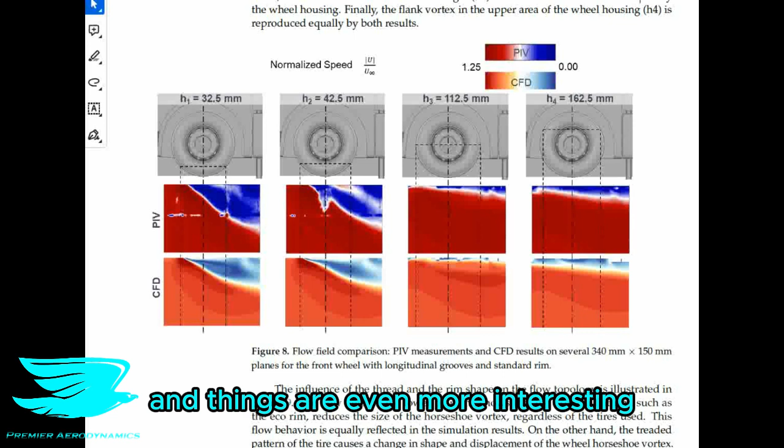Things get even more interesting when you consider the different sections of a wheel. You obviously have the rim, but then there is also the tire, as well as the tread on the tire, like the longitudinal grooves and lateral grooves, and even the wheelhouse packaging. Understanding how all of these things affect a wheel's drag is the first step to reducing it, which is obviously a good thing because you can save fuel and then use that fuel later to create bonfires, or whatever.

So to look at how a truck wheel's rim and tread affects its drag, we're going to look at a paper called Experimental and Numerical Investigation of the Aerodynamic Ventilation Drag of Heavy-Duty Vehicle Wheels.

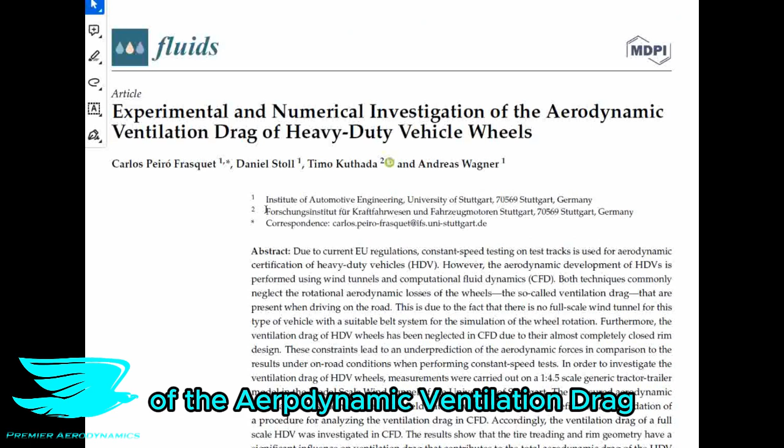This is a cool paper to me because the researchers are not only looking at the typical one wheel configuration in a car, but they also have the double wheel. Sure, the one wheel configuration is quite interesting because you do have some trucks with that at the front as well, but the two wheels stacked together is also quite interesting because we don't see this too often. So we're going to be seeing some results that we don't really come across very often.

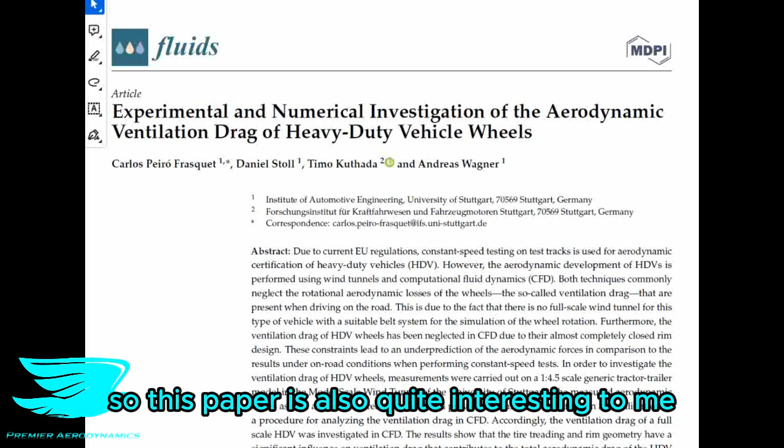This paper is also quite interesting to me because they seem like they really try to do a lot of things in this one. Usually the best approach to a paper is to focus on one specific thing and make the entire paper about that. Here, they're not only looking at the wheels, like the rims and treads, which are really interesting, but also at the CFD setup to look at this, as well as the ventilation drag, which we'll actually get to in a second.

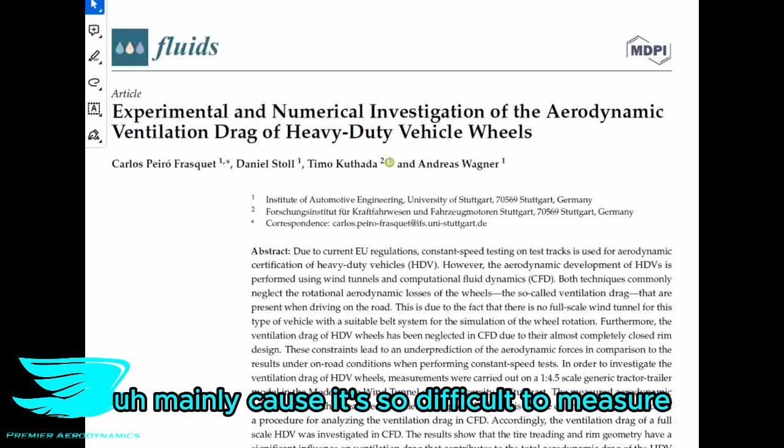The ventilation drag is something that we don't really cover very often, mainly because it's so difficult to measure. So the question is, what is ventilation drag? It's a fairly uncommon term, but it refers to something that can seem like a phantom drag because we can't really measure it in a regular wind tunnel.

So to describe to you what it is, consider a regular car. It has four wheels, hopefully none have been stolen, but anyway, four wheels. And as you are driving along, the air hits them and creates this force backwards on them. We all know that to be the drag.

But the plot thickens when you consider the spokes of the wheels, for example. As the spokes chop through the air, sure, there is a backwards force on them that contributes to the overall drag of the car, like the air is trying to push back the spokes at the top of the wheel so that the car has some resistance going forward.

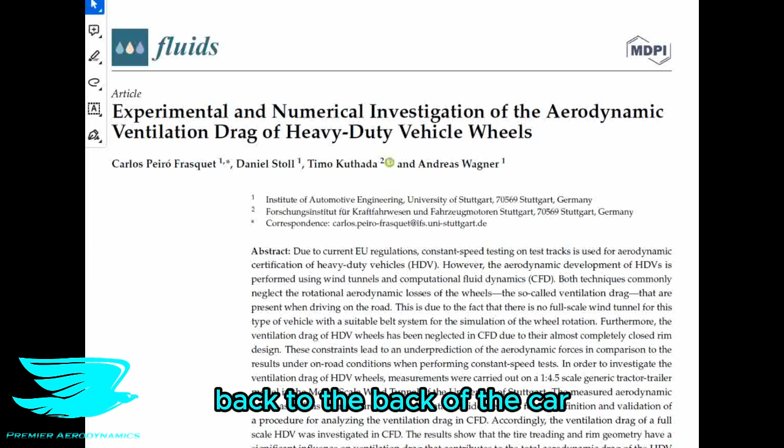But there's also a moment created on these spokes, because if you think about the spoke at the bottom of the wheel, as it rotates back up to the back of the car, it's actually going with the flow at the bottom. So the drag that it produces should be minimal, especially when you consider that the farther away you get from the axle, the greater the distance is, and hence the greater the tangential velocity of that spoke at that point. Hence, they'll match the free stream velocity and potentially even exceed it in some points when you have a wake.

So when you have the front of the wheel, there's some wake coming off of that, and it's hitting the spokes at the bottom of the wheels. These spokes are potentially going to be moving faster than the flow hitting it. So in theory, you actually have the spokes traveling faster, and the air in front of these spokes is actually stopping it from moving backwards, so it's actually stopping the wheel from rotating at this point.

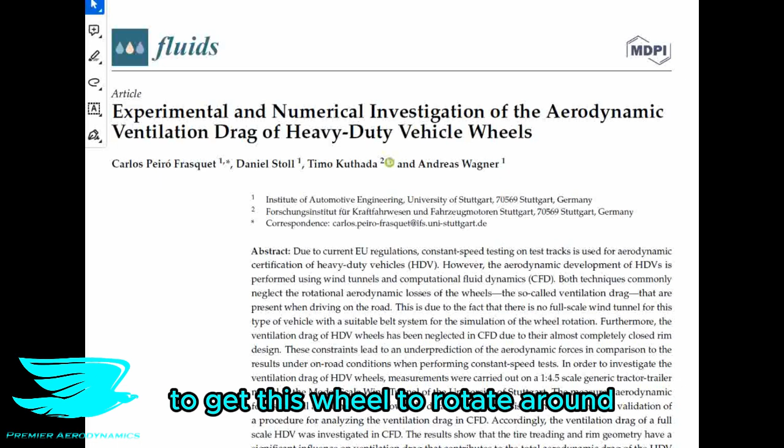And that results in this moment that's effectively resisting the wheel's rotation, which means the car has to put more force into the wheel, more moment, to get this wheel to rotate around. And that is something called the ventilation drag.

And that comes about because even though this spoke is being forced forwards by the air behind it not getting out of the way in time, that actually makes it harder for this engine to push the car forwards. And so we can now expand our focus from this one point on the spoke.

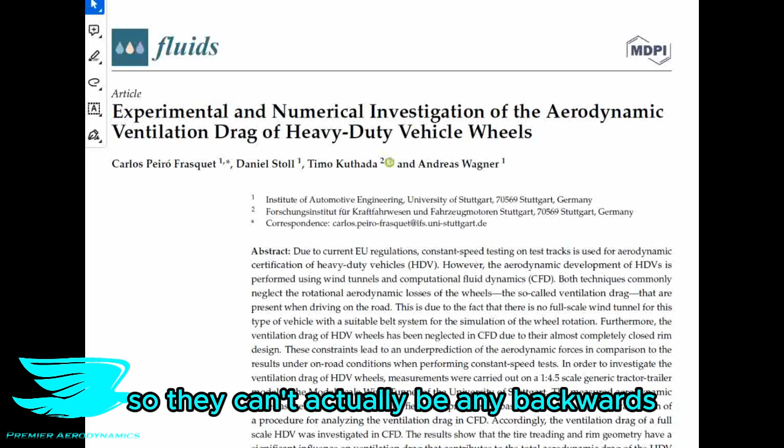Think about the spokes in general as they go around. These spokes are chopping through the air, and even if they are chopping down, the backwards force on the spokes is negligible because the pressure acts perpendicular to the surface, and the spoke surface is parallel to the direction of travel at this point.

So there can't actually be any backwards force or any drag on these spokes when they're completely parallel to the ground. But because the spoke is struggling through the air, that creates more resistance for the engine to overcome, and hence it is kind of like a drag. And because of air, it is in fact a drag, and this is what ventilation drag is.

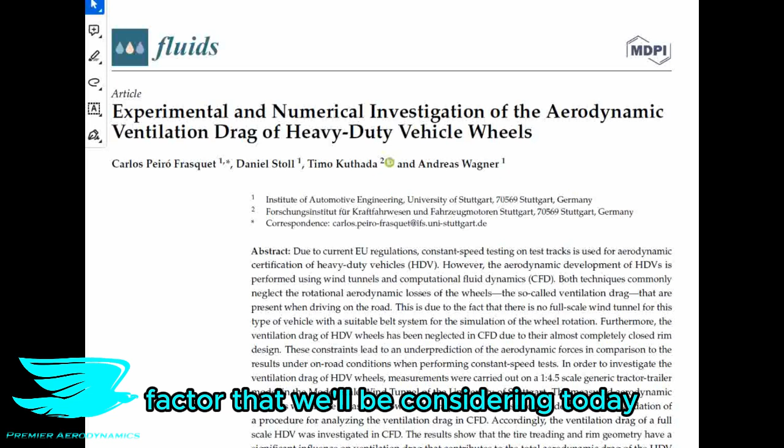That is one additional factor that we'll be considering today. And ventilation drag comes about not just because of these spokes, but also because of the tread, which we'll get into later on this podcast. So let's jump into the researchers' methods to see how they investigated the effects of the rim, tread, and number of wheels on the drag and ventilation drag.

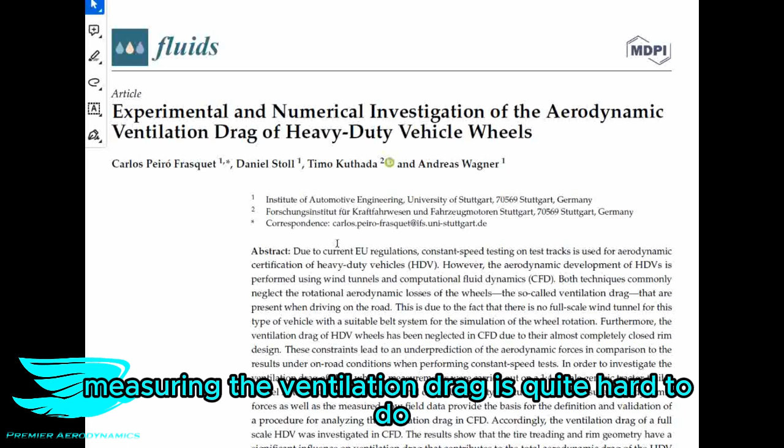I should also mention that measuring the ventilation drag is quite hard to do. One common method is to see how much load there is on the units driving the wheels in the floor. Another method is by putting torque meters in the axles that connect to the wheels to see how much moment is being produced. So now let's move on to the methods.

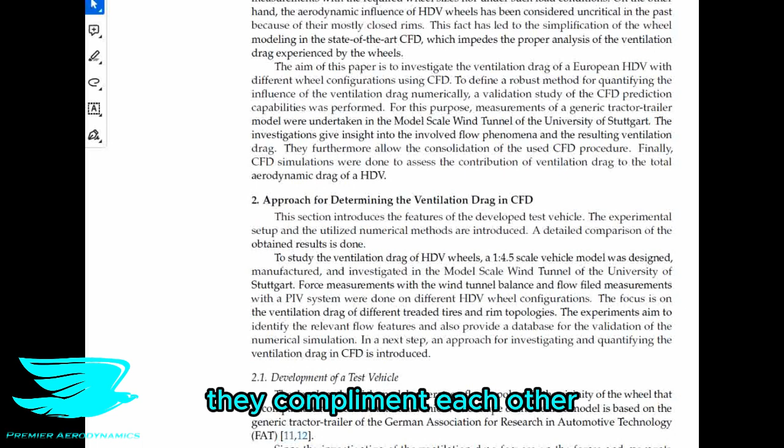So they used both CFD and experiments, which is good because when done well, they complement each other. And first of all, they used a 1 to 4.5 scale model of something they term a heavy-duty vehicle. Figure 1 here shows this vehicle.

It is a half model with only the left half of the vehicle modeled, and then there's this splitter plate going down the halfway point. And that definitely introduces some limitations because the periodic vortex shedding nature is not captured. But for a general idea of how the wheels affect the drag, this is an okay approach.

So the reason why they might have gone with this model could be to get a higher Reynolds number with a larger model, or it could be to reduce the number of cells they needed in their CFD with only a half model here. They say that this vehicle develops a flow topology in the vicinity of the wheels that is comparable to a real commercial vehicle. I'm not really sure how comparable it is because they don't give any numbers or figures, but as a general approach, I guess it's okay.

To be perfectly honest, there are so many different types and shapes of heavy vehicles that it's not so much that this vehicle approximates a typical heavy-duty vehicle, but rather that there isn't really a typical heavy-duty vehicle when you think about it. So this geometry is fine, I guess. There are also different types of heavy-duty vehicles. So this is just a generic type, I guess.

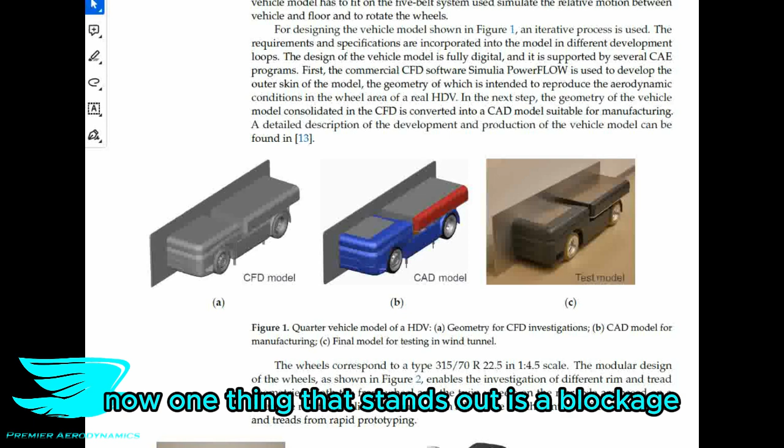Now, one thing that stands out is the blockage ratio that I mentioned. So for this model in a wind tunnel, it is 7.8%, which is quite high. I mean, because they have a 3/4 open test section, which actually I think in figure 5, if we scroll down, here we go, we actually see this test section here. We have the 3/4 section open test section.

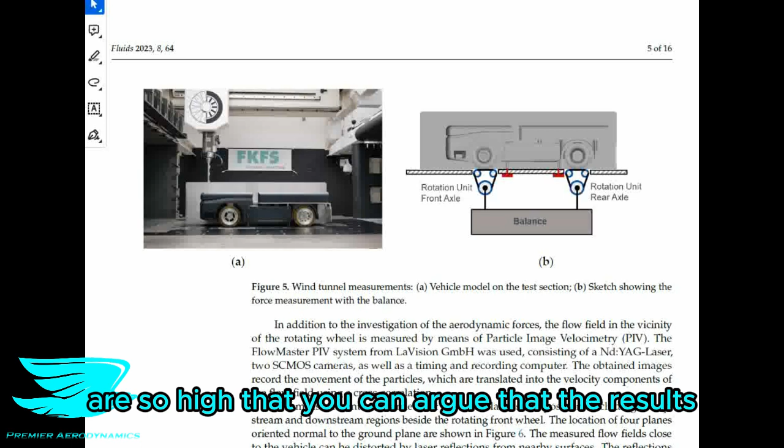And for something like this, the upper limit is about 15% blockage ratio, but once you start getting above about 10%, the correction factors are so high that you can argue that the results really aren't that valid anymore anyway, because the flow physics has changed so much. But even at 7.8%, that means you need to have quite a decent amount of correction.

And obviously you can actually get a higher blockage ratio in a 3/4 open test section than a completely closed test section. And for those of you who don't know, the 3/4 test section means that you just have one surface present and the other 3 walls around the test section are not, as we see here in this figure.

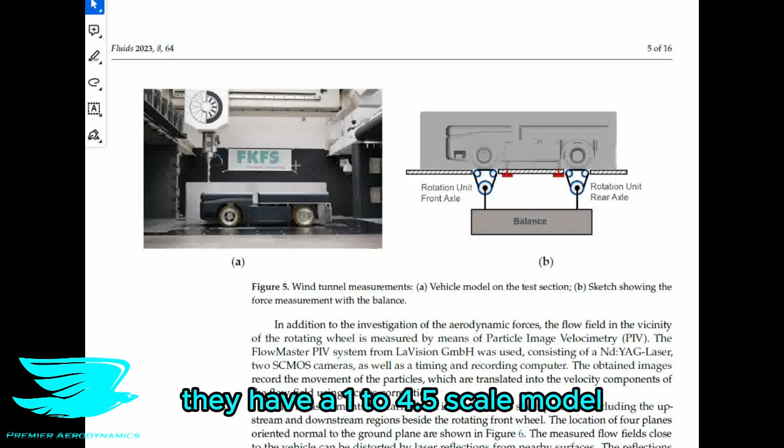As mentioned, they have a 1 to 4.5 scale model. If they went even bigger to something like a 1 to 4 scale model, the blockage ratio would be really high. They also say their goal was to achieve a fully turbulent boundary layer at a Reynolds number of 300,000, which is also one of the reasons why they went with such a scale.

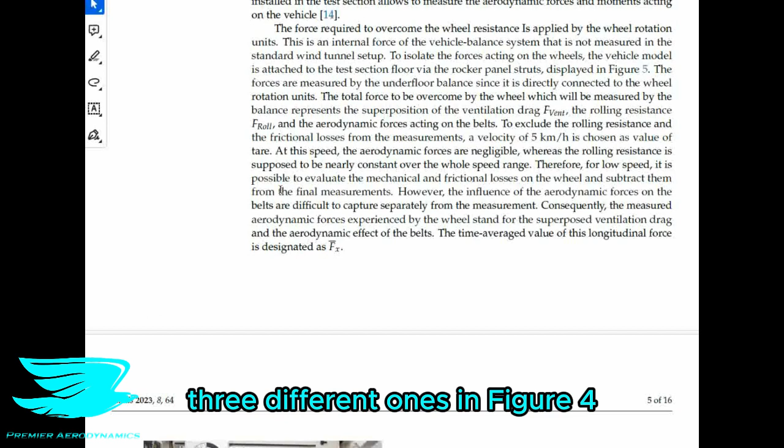Now, to test the different rim designs, namely the 3 different ones in figure 4, if we scroll up here, these 3 different rim designs, they used a modular rim design where they had effectively the base rim, and then they could just add additional parts to it, as you see here in figure 2.

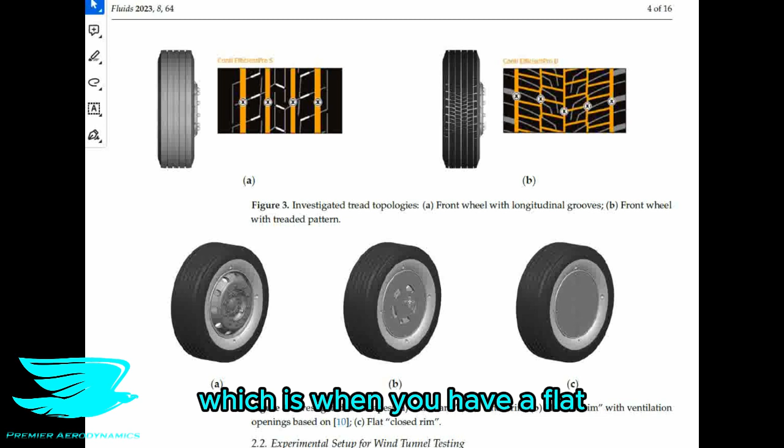They then have the typical truck rim, which has this raised center, as we've all seen on trucks. They then have something called an eco rim, which is when the rim is actually flat instead of poking out, and that has only a few openings, probably just for the cooling flow. That's about it, I'd imagine here.

And then they have a completely closed rim, which usually achieves the lowest drag, and we'll see in this investigation if that is also the case. My money is going to be on that - this is going to be the lowest drag rim.

So they also tested 2 different tread types, 2 different tread patterns. The first one in figure 3A is just this longitudinal groove, and the second one is with the lateral grooves as well. So you have the longitudinal grooves and the lateral grooves.

This is what I mentioned earlier, where they're trying to do so many things in this paper. In my opinion at least, they end up with different rims, different treads, different ventilation drags, CFD setups, and by trying to do everything in one paper, you usually do nothing that well. Usually you just have one different type of rim design or different rims to test, and then one different tread or different tread patterns, or you just focus on the CFD method, not all of them at once. So that results in a lot of questions being raised about the results.

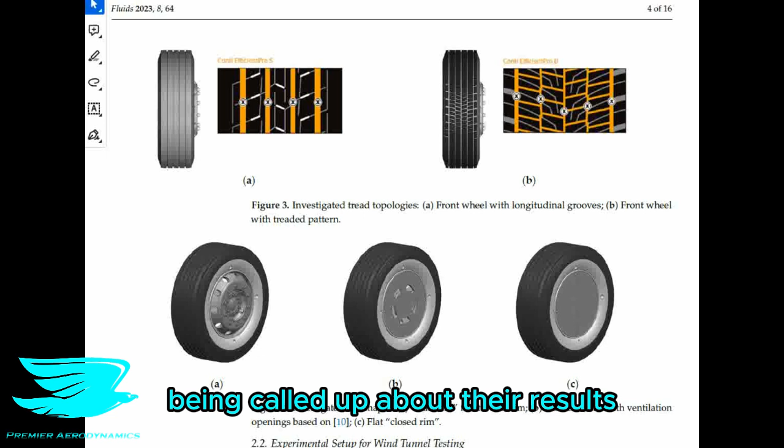But anyway, in figure 3, this shows the tread patterns investigated. The longitudinal grooves are the ones that go circumferentially around the tire, and the lateral grooves go across the tire, connecting the inside parts of the tire to the outside parts.

In fact, one of the hardest things to do when it comes to groove pattern aerodynamics is to somehow characterize them properly, because there are more tread patterns than you can poke a stick at. If you go into any car mechanic or something, you will see so many different types of treads.

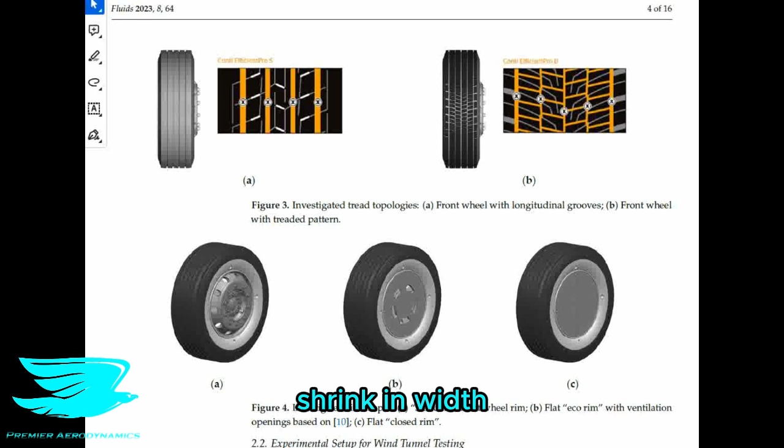So you have these lateral grooves at different angles, different depths, different widths of the lateral grooves and longitudinal grooves as well. On top of that, you then have to consider how the geometry changes when the wheels are rotating, because as the wheel rotates, the rubber, which is elastic, deforms and starts to stretch out in diameter and then shrink in width. Then you have the wear and tear aspect on tires, where people are driving around with all different levels of wear and tear. So there are so many aspects to consider when looking at tread patterns and their effects on aerodynamics, which makes it really hard to do.

In my opinion, it's probably the hardest thing to do on cars in terms of aerodynamics at the moment. So anyway, we can see that there are 2 different tread patterns here on 3 different rim designs, making a total of 6 different configurations.

Now, the authors say that the experiments were conducted in the model scale wind tunnel at Stuttgart University, which we saw in, I think it was figure 5. They then say that the wind tunnel features a state-of-the-art setup, including a 5-belt system.

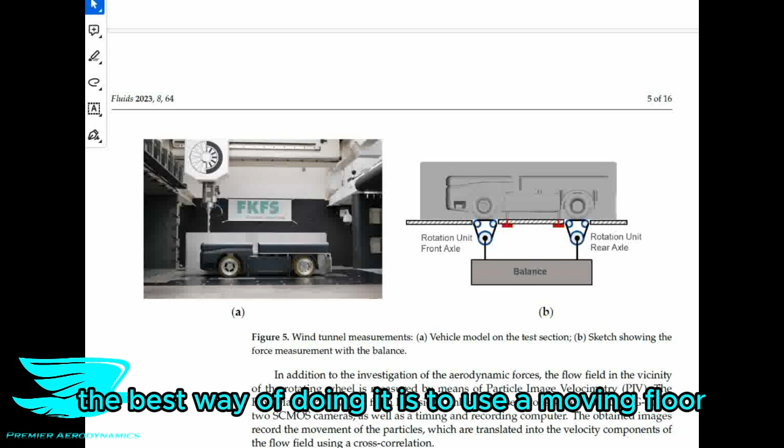For those of you who don't know, when you simulate wheel rotation, the best way of doing it is to use a moving floor, achieved by using belts that are driven on the ground underneath the car. In figure 6, if we scroll down to that, we can see one of the wheels on one of the belts just here. It's a little bit hard to see, but just underneath this contact patch is literally where you have this moving belt. It's usually like this sheet metal that goes around.

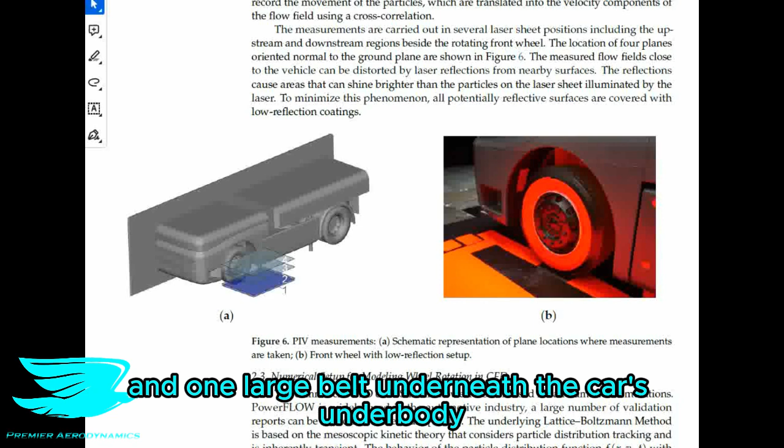This particular belt system is called a wheel drive unit because it drives the wheels. A 5-belt system is where you have one belt under each tire and one large belt underneath the car's underbody between the two tires, the left side and the right side. The belt extends from a little further upstream than the start of the car all the way past the rear of the car.

So why do we have these 5 belts? It's obvious we need one belt for each wheel to drive them, but we also want to drive the underbody. So why do we have this large belt underneath the underbody?

This is to make sure the boundary layer grows there in the right way, or actually that it doesn't grow at all. This matters because if you imagine a car driving along, the car moves along the road, but there is no relative motion between the air and the road, unless you have a gust. Let's say it's a still day, there's no relative motion between the air and the road. It's the car that is moving, so no boundary layer forms on the road.

But in a wind tunnel, we accelerate the flow and the ground is stationary, so there is relative motion between the air and the ground. This creates a boundary layer, which is exactly what we don't want, because that doesn't replicate real life conditions. So the large belt underneath the car stops there being relative motion between the air and the ground, because the ground there, the belt, is moving at the same speed as the free stream air.

Hence, no boundary layer forms, at least generally speaking. If you have some wakes etc., that affects the boundary layer and the ground, but that's also somewhat true when you're driving along. Now you might be thinking, what about upstream? Air is coming from there and there's no belt there yet, the belt only starts as we approach the car.

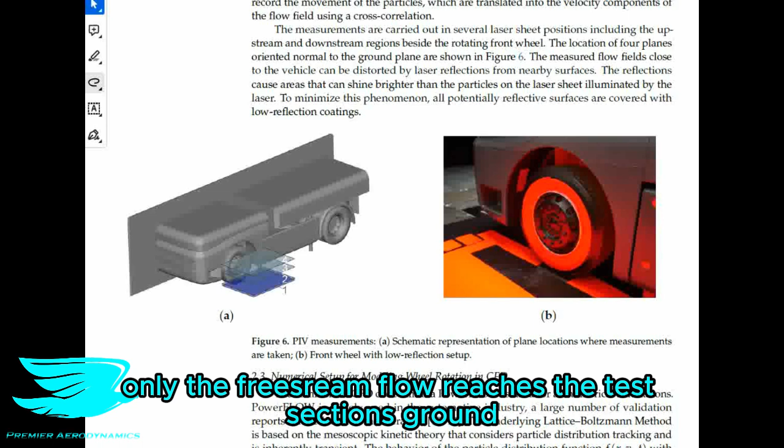The boundary layer control system consists of the following. As the contraction reaches the test section, there's a boundary layer scoop that cuts off the boundary layer and diverts it away from the rest of the test section. So only the free stream flow reaches the test section's ground. At the start of the test section, the flow is the same free stream velocity as when you go up into the middle of the flow. That's what's on the ground.

As the flow flows along the ground towards the car, a boundary layer does grow. But just before the car, there's a suction system, literally a bunch of holes in the ground that sucks the air in. That ideally gets rid of the boundary layer so that now the only air hitting the belt is the free stream flow.

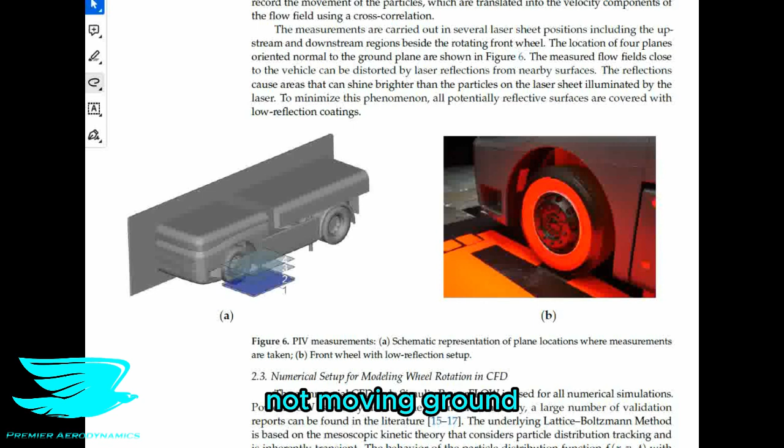Now for the 5-belt system, things get even more complicated, because there are no belts between the front left wheel and the rear left wheel, or between the front right wheel and the rear right wheel. Literally between the two wheels, upstream and downstream, there's just regular floor, not a moving ground. As such, a boundary layer can grow in each one of these regions.

So to stop that from happening, at least ideally, there are things called blowers at the rear of the front wheel drive units. These blowers literally blow free stream air velocity behind the front two wheels to overcome the boundary layer that would usually form there.

Then behind the rear wheels, there's no belt between them and the rear of the car, which means boundary layers could grow there as well and affect the diffuser. So to overcome that, blowers are also used at the rear of the rear wheel drive units, to overcome that boundary layer too.

So the boundary layer control system is just what I mentioned there, in a nutshell.

As I said, I could go on a lot about this and the difficulties associated with them, but that would have to be for another podcast and many other podcasts. Instead, I want to focus on something they say here, and that is that this facility the authors are using has a 5-belt system, is state-of-the-art.

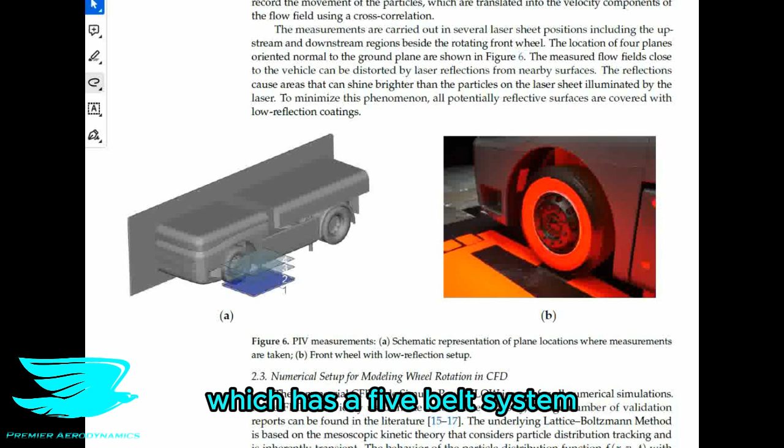Well, a 5-belt system is not state-of-the-art, actually. A 1-belt system is, where the entire car just goes on one big belt. That is state-of-the-art. In fact, you could even argue that a 3-belt system is better than the 5-belt system, because now there is the technology to measure the forces on the wheels through even a 1-belt system. So technically, a 5-belt system is not state-of-the-art. It's good, but not the best.

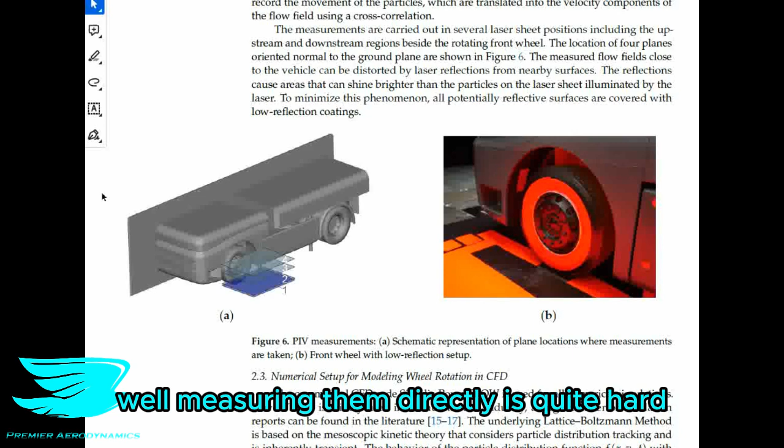But anyway, let's move on. Remember how we were talking about the ventilation drag of the wheels measured? Well, measuring them directly is quite hard, and those researchers didn't do that exactly. Instead, they measured it coupled with the rest of the wheel drag, which is still pretty good. You don't come across that too often.

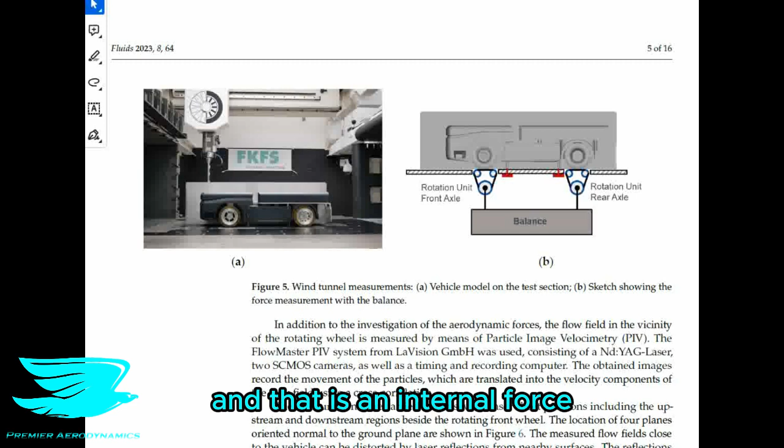However, the problem with that is if you want to know what the ventilation drag of the car wheels is, that is the force determined by the wheel drive units, and effectively how much you have to drive these wheel drive units. And that is an internal force. So you don't get to know that through the normal setup that we have here.

So in order to add the ventilation drag to the overall drag of the wheels, the researchers secured the car to the wind tunnel with these red struts, which would usually be connected to the load cell. Instead, they connected the wheel drive units to the balance. That way, they could measure how much force the wheels were putting into the wheel drive units, and as such, the ventilation drag as well.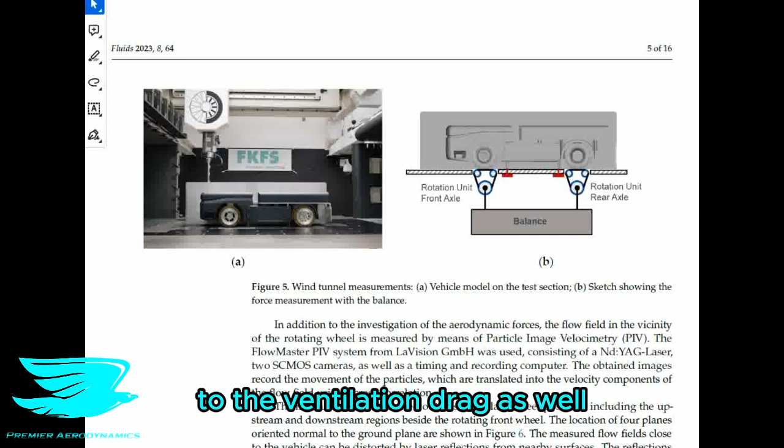So to do that requires a lot of work to change the setup. This is a very complicated and sophisticated setup, and just to change this takes a lot of time and work. It can even be risky, because these load cells are incredibly sensitive, and if you start changing things, there's no guarantee that when you put things back, you're going to get it right and the uncertainty will be the same. But anyway, these researchers went to great lengths to do this, so that's pretty impressive.

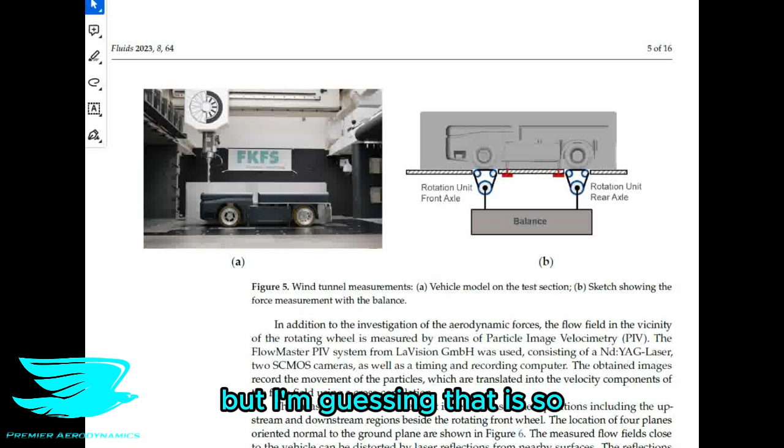They say later on that the uncertainty in the load cell is plus or minus 0.1 newtons, which is quite low. I'm not sure if that is a 95% confidence interval or not, but I'm guessing it is, because that's usually the standard for these load cells.

So in addition to the forces they took in this setup, they also took some PIV measurements, which gives us some really interesting results, and we'll see them later on.

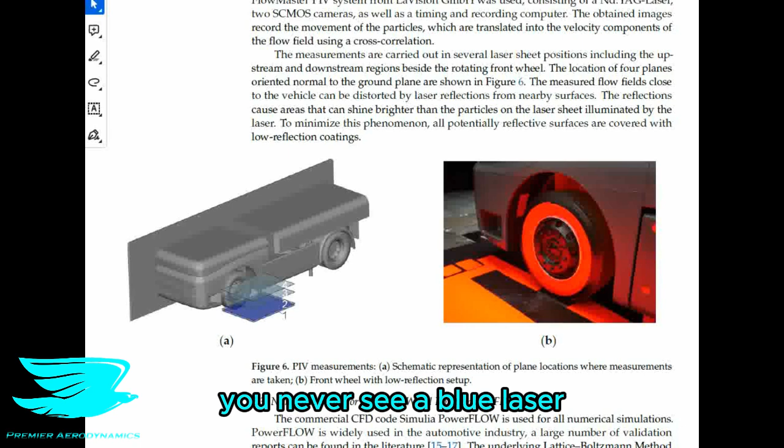The PIV laser they used was an Nd:YAG, which is like the most common laser ever. It's pretty good. It gives a green laser, but it gets boring after a while because you almost never see a non-green laser. You never see a blue laser or a red laser or an infrared laser, which you can't see anyway, but it would still be nice to imagine seeing it. You only ever really see green, and I just don't want to exclude any other colored lasers. All are welcome, and we should make a greater effort to have different laser colors.

Anyway, they took the PIV laser sheets around the front wheel, which we are showing in figure 6 here, in these 4 sheets here. So let's move on to the CFD setup, because they use a Lattice-Boltzmann method solver.

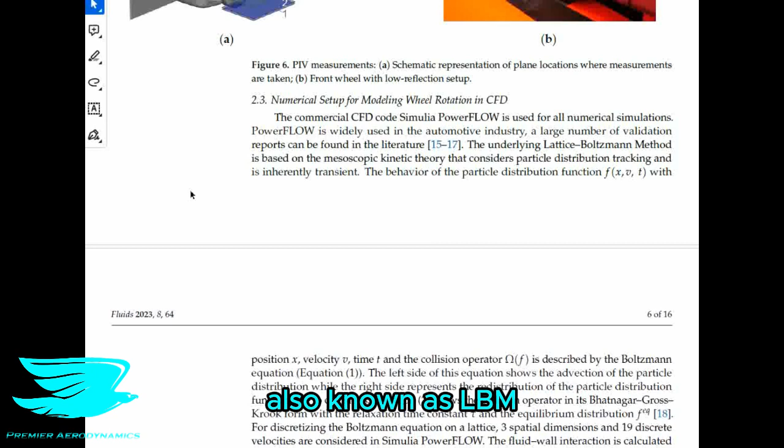And if you don't know what a Lattice-Boltzmann method solver is, also known as LBM, they are the main alternative to Navier-Stokes solvers at the moment. Navier-Stokes solvers are by far the most common CFD solvers, but Lattice-Boltzmann is becoming more popular because it is a much more efficient approach when you have multiple cores. That is because of the type of information shared between the cores and how much information is shared.

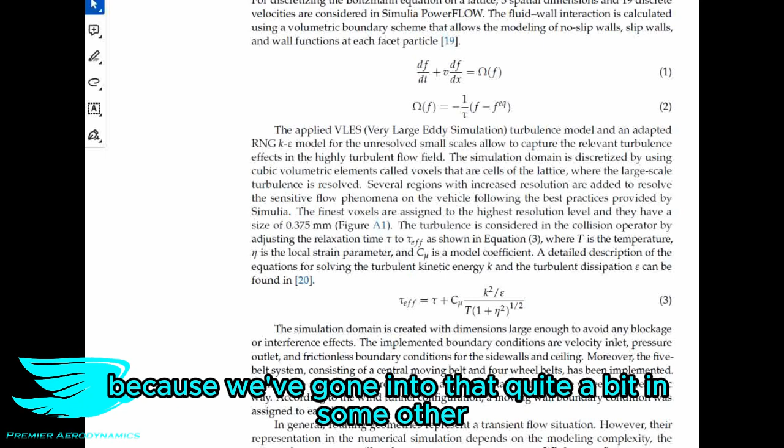I won't go into that because we've covered it quite a bit in other podcasts, numbers 85, 86, 91, and 92. So if you want to know more about LBMs, check out those podcasts.

Anyway, this setup is mostly what you'd expect, except when you get to the wheels. Simulating the wheels has been the bane for automotive aerodynamicists for a long time, and even still, there isn't an accurate way of doing it. In fact, the most promising way is what these researchers have done, but from what I can tell, they didn't actually need to use this method. Let me explain what I mean.

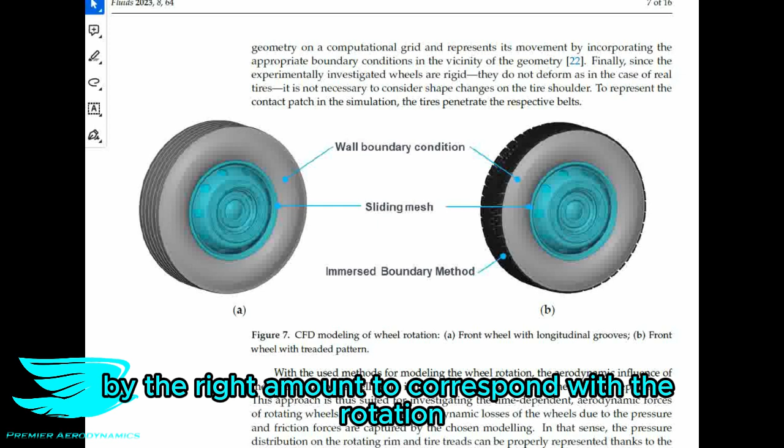These researchers used a sliding mesh on the rim, which is quite standard practice. This means each rim has its own little domain, completely circular, and each time step this little domain rotates by the right amount to correspond with the wheel rotation. This is completely fine, as long as you get the meshing at the interface right, which only happens if you have a fine enough mesh. Otherwise you get mismatching between the local domains and the global domain. But anyway, it's simple enough, generally speaking.

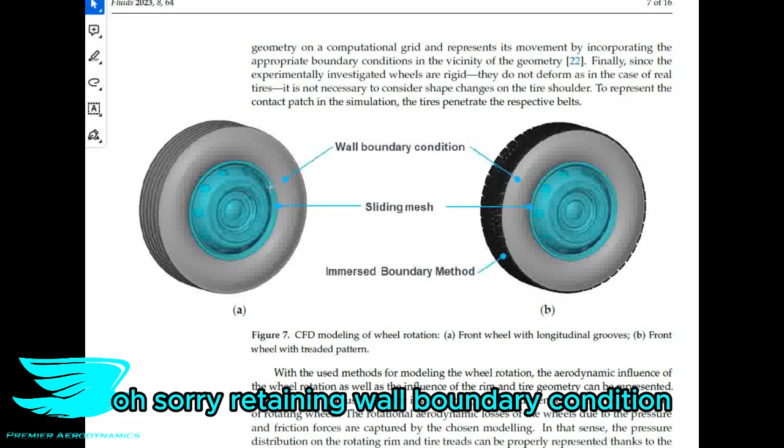As for the side walls of the tires, they have a rotating wall boundary condition, which is good for this purpose because these walls are smooth. What that means is there's a tangential velocity applied to these walls, and that simulates their rotation. That's fine too for this particular approach.

Now we get to the good part, which is how they simulated the tread. To do this, they used a method called the immersed boundary method. This is really cool, particularly for simulating fluid structure interactions. A fluid structure interaction is what it sounds like - where you have a fluid and a structure interacting, and usually one affects the other and vice versa. In this instance, using the immersed boundary method for the tire is very good.

It's very promising because the tire deforms not only as you spin it, but as it reaches the contact patch on the ground, it touches the ground and has this loading on it, so it deforms, and as a result there's this bulge that forms. Then as it rotates back up, the tire gets pulled and stretched. So there's quite a bit of deformation going on throughout the entire rotation cycle.

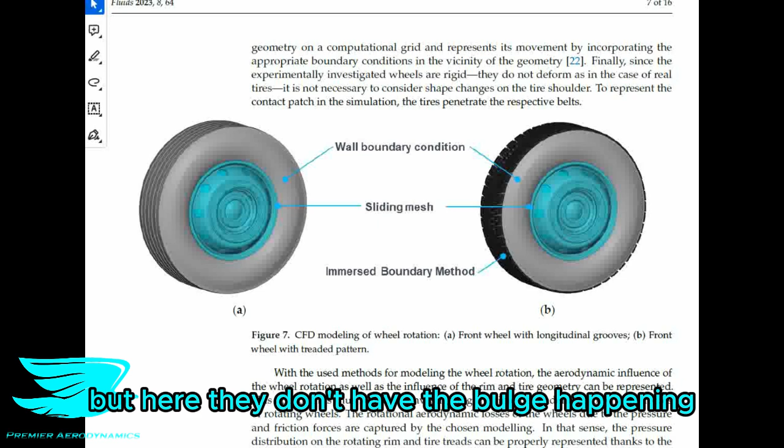Now, if you were to use the sliding mesh approach, which has been the typical way of simulating rims, we couldn't actually simulate the bulge, because as the tire rotates around, the deformation begins, and then when it lifts off, it doesn't - there's no axisymmetric thing going on here. But in this case they don't have the bulge happening, and this is because they have a rigid tire.

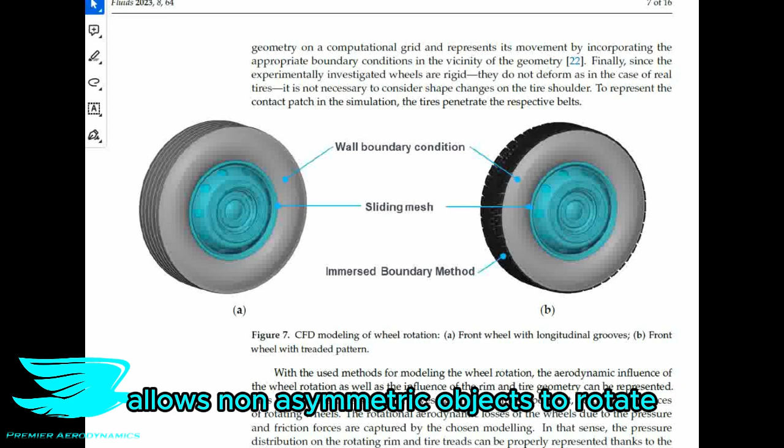The immersed boundary method allows for this deformation to occur because of how it works: if we effectively have two grids on this domain, when the solid deforms, it tells the other grid, hey, this is actually fluid in this region now, so you use the fluid equations instead of treating it as a solid. Then when it becomes a solid again, it says, okay, I'm now a solid again, so at these points we're going to use the solid equations and not the fluid equations. So the immersed boundary method allows non-axisymmetric objects to rotate and even change shape.

Now, in this particular case, as I mentioned, these researchers chose to use this IBM method here, this immersed boundary method, but the tire is not deformable. So I don't see why they decided to use that method instead of just putting the entire wheel in the sliding mesh method, because the sliding mesh method will handle an axisymmetric tire as we have here. But maybe it worked out to be less computationally expensive for them because they had fewer cells rotating, which is inherently quite taxing. Or maybe they were having problems with the sliding mesh meshing the ground.

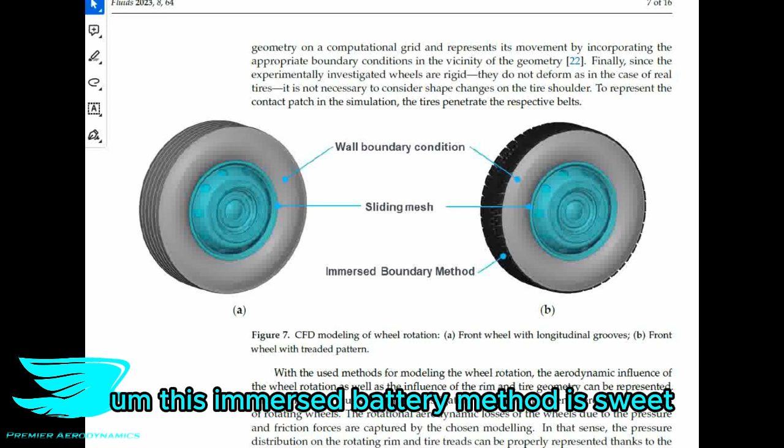I don't know. Anyway, for a normal car tire with deformable tires, this immersed boundary method is sweet. But for this particular case, from what I can tell, it's not really needed here. But anyway, it's cool to see it in application.

So the CFD that they used was very large eddy simulation, which is similar to large eddy simulation, LES, except instead of being large eddy simulation, it is very large eddy simulation.

One important thing to note is that they said the simulation domain is created with dimensions large enough to avoid any blockage or interference effects. While this sounds cool, it's not actually a great idea here because they should be making the CFD domain match their wind tunnel domain. Otherwise, you really aren't comparing the same thing.

When you use your validation data from your wind tunnel, your validation data corresponds to a different setup than your CFD. The wind tunnel setup places certain conditions while the CFD places other conditions, so they're not the same. That can and usually does lead to differences in the results from the experiments and the CFD, which means that when you're trying to validate your CFD, neither are actually wrong—it's just that they're looking at different things.

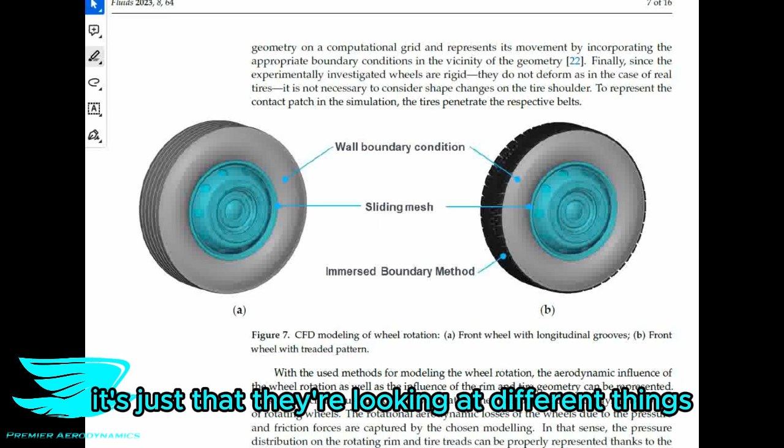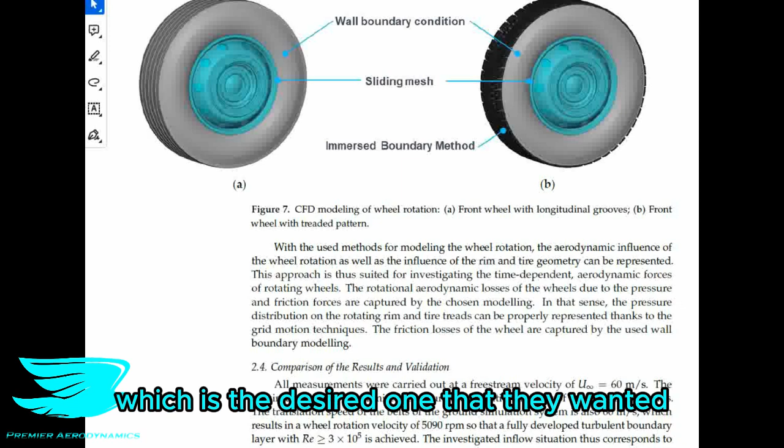So anyway, let's move on to the validation part of this CFD. The CFD and experiments, I presume, were carried out at a free stream velocity of 60 meters per second—that's what it seems like they're saying—and at a Reynolds number of 300,000, which is the desired one they wanted. For a full-scale equivalent, they said for the heavy-duty vehicle that is equivalent to a 50 kilometer per hour speed.

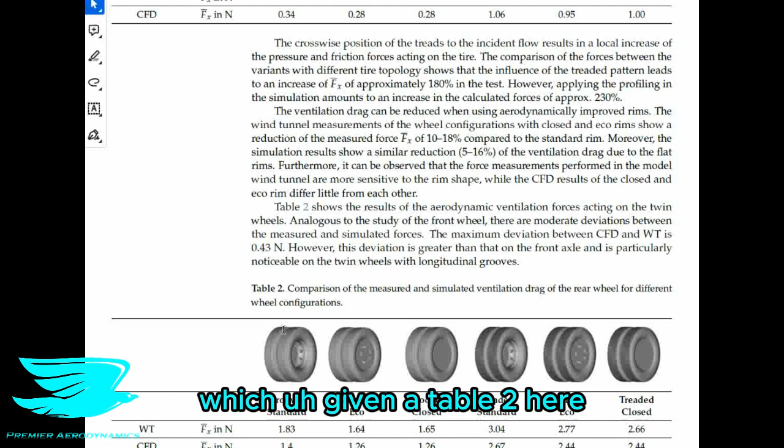Table 1 shows a comparison between the CFD results and the experiments for the single front wheel. Remember, we also get to see the double wheels at the rear, given in table 2. But now let's look at the single tire.

The wind tunnel results show that making the rim flatter—going from this three-dimensional popping out rim to a flat rim and then a completely closed rim—reduces the drag, which is good because that is what we see in a lot of different papers.

But when we compare the tread pattern, we see that incredibly, adding the lateral grooves greatly increases the drag. With just the longitudinal grooves on the left, we see drag of about 0.37 newtons, and for the same rim but now with lateral grooves, it's up to 1 newton. So it's a 170% increase in the drag.

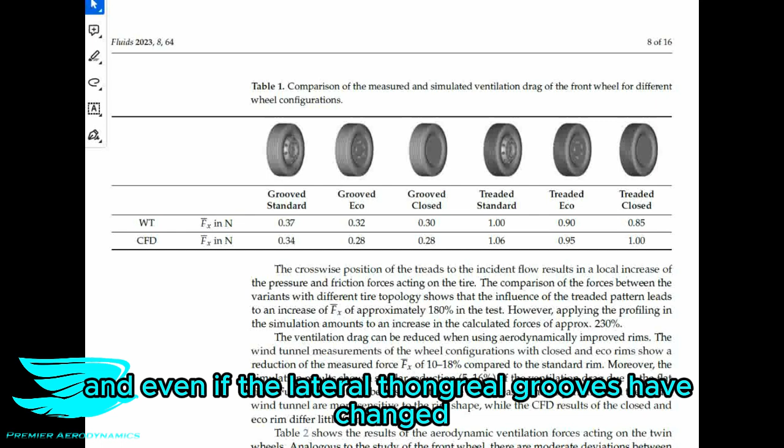This is about what we see with different rim designs as well—if we go from the grooved eco to the treaded eco groove close, it's all about the same, roughly a 170% increase in drag just by adding lateral grooves. I assume the longitudinal grooves haven't changed, so it's just the lateral grooves added, and the drag more than doubles, almost triples. Even if the longitudinal grooves have changed, the fact that the tread can make such a difference is unbelievable—I don't believe it.

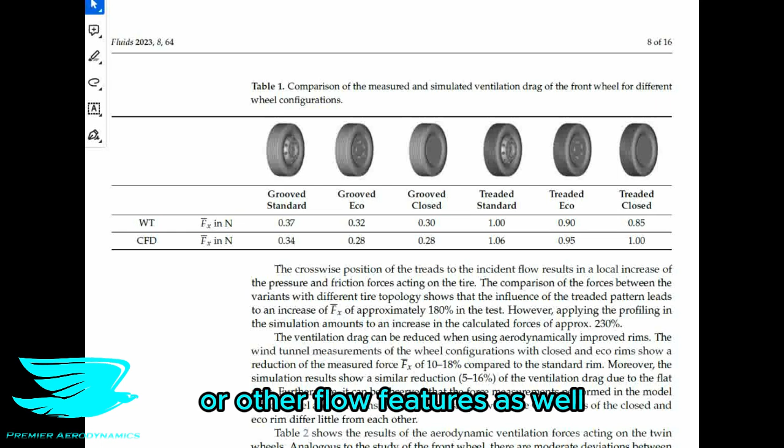However, there's maybe a good reason why lateral grooves make such a big difference to the drag: they change how the flow goes around the edge of the tires, also known as the shoulder of the tires, and this greatly affects whether the flow remains attached or separated. So there's reason to believe these small additions can greatly affect the drag, and we'll see later in the PIV results whether they did indeed affect the flow separation pattern or other flow features. Later on when we discuss ventilation drag, we'll talk about this a bit more.

But first, let's look at the CFD validation, because in table 1 we also have the CFD results for these very same wheel configurations.

The good thing is that for the wheel with just longitudinal grooves, the CFD is quite close to the wind tunnel results. The CFD gets the general trend right—when you close the rims or get them smoother, the drag drops. But there is a fairly consistent 10% error between the CFD and the experiments. This is almost like a systematic error, we can say.

If we go to the wheels with the lateral grooves, we see that the CFD starts to perform much worse. The trend of the drag dropping with smoother and more closed rims isn't present here - it goes down and back up. But it does capture the trend of drag jumping up a lot between the longitudinal grooves and the longitudinal plus lateral grooves together. So that is, I guess, good to get.

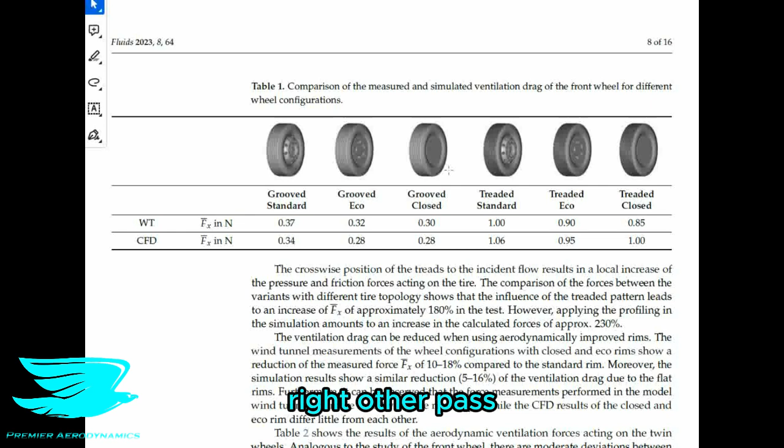But to be perfectly honest, I don't know what the exact problem is here. There are some parts it gets right, other parts it gets wrong. I do have a couple ideas as to what is wrong with the CFD, and one possible reason is that the mesh isn't fine enough.

There's no mesh independence study here, or even a time step independence study. Because we're dealing with quite fine details - in this case the lateral grooves - these fine details obviously affect the results substantially. Perhaps the mesh isn't fine enough in this region. That is one possibility.

The other possibility, which I am a little more confident in, is that this error in the CFD is caused because it doesn't include the wind tunnel test geometry. As I mentioned, this is a 3/4 open test section, meaning the flow coming out of the contraction typically expands in cross-sectional area to equalize the static pressure in the free stream compared to the barometric pressure in the surroundings. As such, the streamlines in the flow won't be completely aligned with the hoped-for free stream direction.

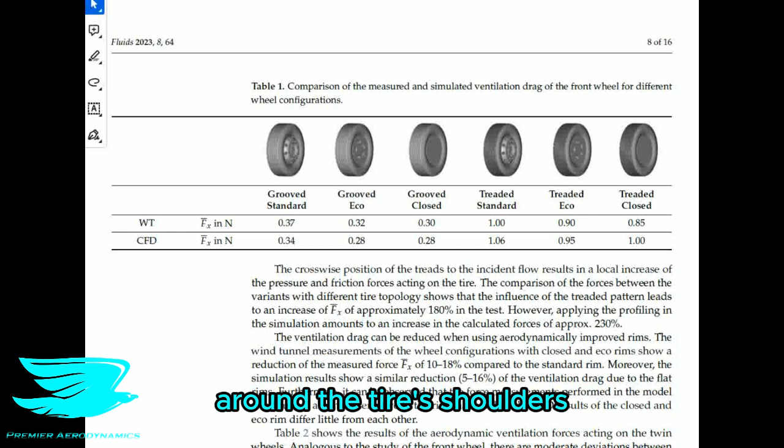They'll be a little bit skewed. As such, the streamlines hitting the wheels in the wind tunnel and the car in general will probably differ from the CFD. So the flow around the wheels will be very different, including the separation around the tire shoulders. Maybe both of these reasons - the meshing and the different test sections - explain why the CFD is off, or maybe only one of them is the case. I'm not too sure here.

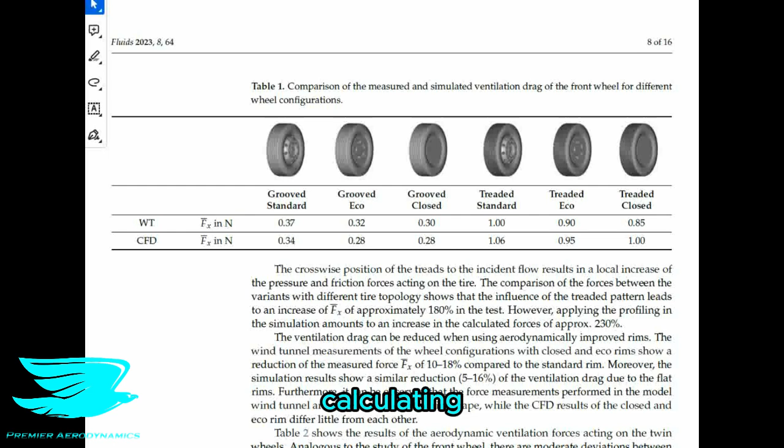We don't have enough results at the moment. Also, perhaps the atmospheric conditions used in the CFD weren't the same as the wind tunnel. For example, perhaps the density of air wasn't the same between the two because of different barometric pressures and humidities. I didn't see anything in this paper about calculating the density of air in the wind tunnel, especially considering we use it for the CFD as well. So the density in the wind tunnel could differ from the CFD, and that could give a couple percent error quite easily, leading to these errors seen here too.

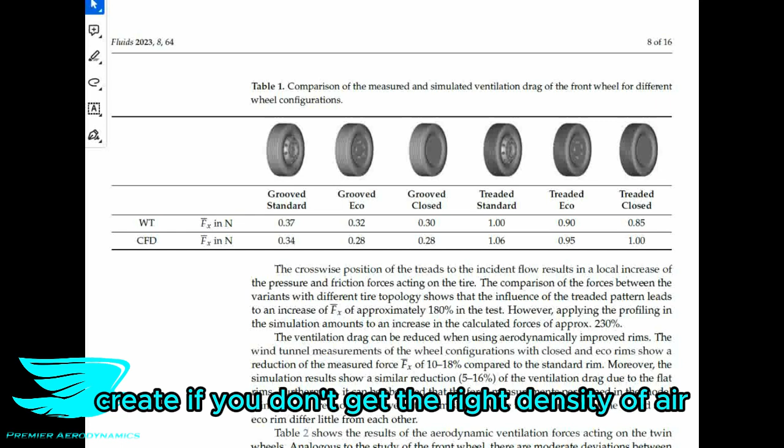So anyway, I think we have a few likely reasons why the CFD here isn't agreeing that well with experiments so far. But let's move on to Table 2, because this table now features the double wheel configuration, which I'm quite looking forward to seeing the results of. I don't get to see these too often.

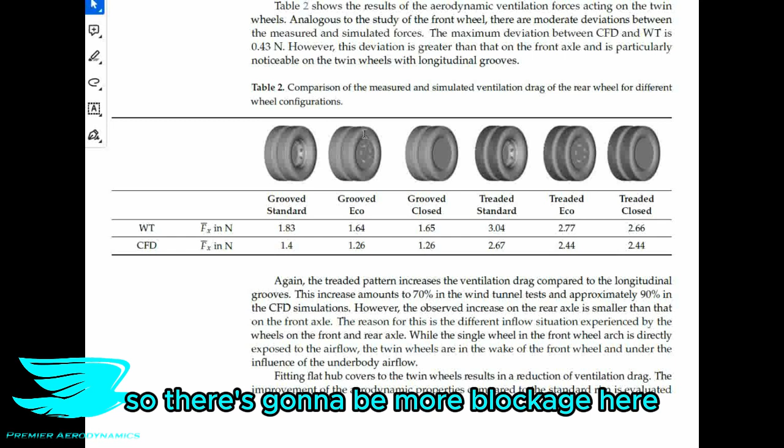Now, for the wind tunnel results on the top line here, we see some pretty interesting trends. For the tires with just the longitudinal grooves, we still see the typical drop in drag when we smoothen the rims, but closing the rims only helps to some extent - going from mostly closed to completely closed doesn't really do anything for the drag on the longitudinal grooved tires. This might just be because having the double wheel greatly reduces the flow coming through the rims anyway, so there's a bit more blockage here.

So closing it mostly isn't really going to yield much difference compared to completely closing it. However, when we put the lateral grooves on, we see the old familiar trend where closing the rims more and more always reduces the drag. Why is this? Well, they don't give any flow visualization on it, so we've been left high and dry on that one.

My guess would be that with the lateral grooves, the separation is affected around the shoulder, and maybe that pulls more air through the rims and makes these rims play a larger role. Anyway, that would be my guess, and maybe some things we weren't meant to know yet. I mean, you don't give everything away on the first date.

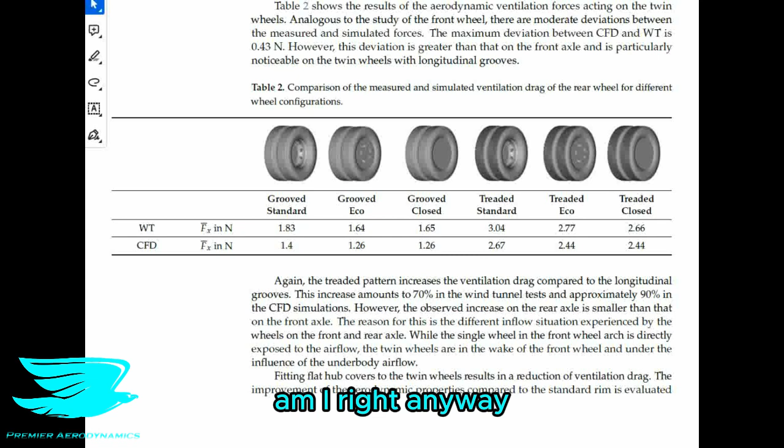What we can see is that for this double wheel configuration, adding lateral grooves also greatly increases the drag, but not as much as for the single wheel. Remember, in the single wheel, when we added lateral grooves, the drag increased by 180%. Here it's only about 70%. That is likely due to the inside wheel not really being affected as much by the lateral grooves as the outside wheel. The inside wheel of the double wheel setup is not exposed to a lot of fast moving flow, so the grooves probably won't have as much of an effect because they just don't have the flow to work with. That is my guess anyway.

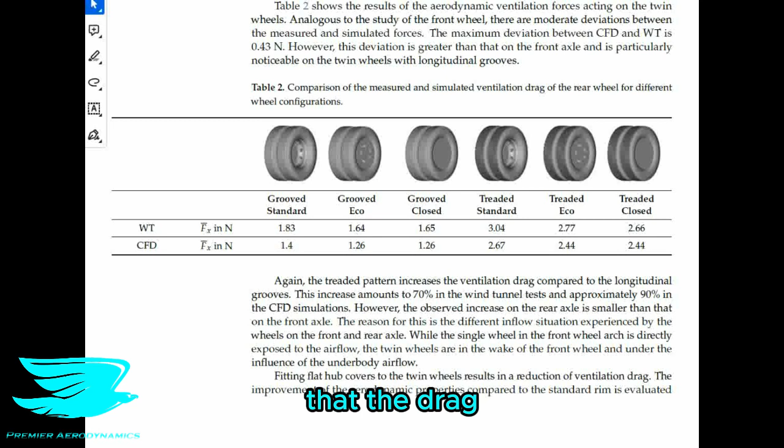Now for the CFD here, it is mostly all over the place. I mean, yeah, the general trend of closing the rims reduces the drag is present, but the absolute values are quite wrong, and the amount that the drag drops with the closing of the rims, again about 10%, but the absolute values are also different, and the relative differences are similar. So it's all over the place here.

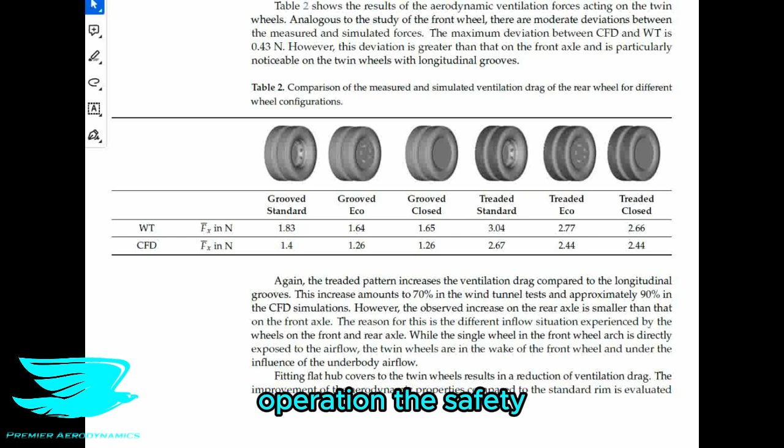Then with the lateral grooves, the closed rim trend tends to hold less, and the amount the drag changes isn't the same. So I think when it comes to the double wheel configuration, the CFD isn't really trustworthy because I just don't know what is good and what isn't. It's a kind of higgledy-piggledy. Overall, I would probably score the CFD on the single wheel maybe a 6 or 7, and with the double wheel maybe a 4. I don't know how we can use the CFD for this double wheel configuration to see anything. But let's move on to the PIV results to get a better understanding of how the different rims and tread patterns affected the flow and why we are getting these drag changes.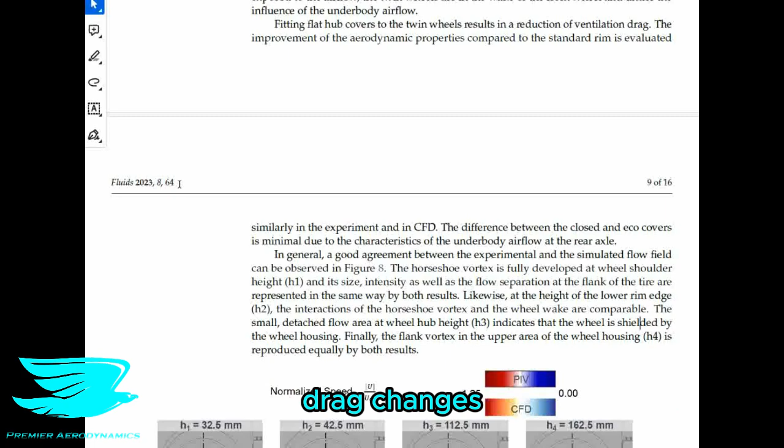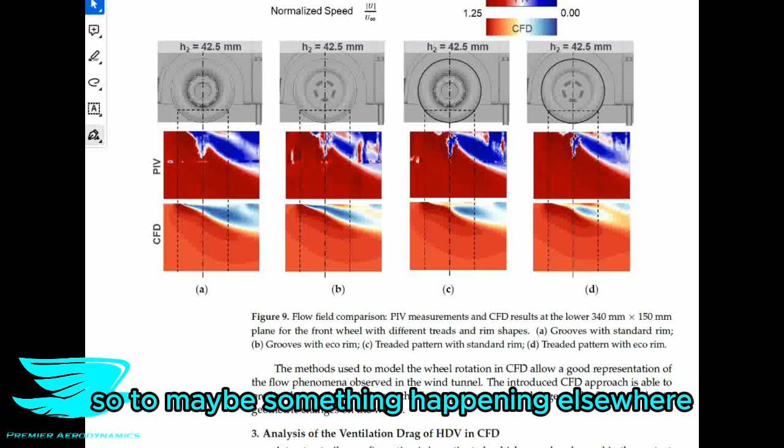So in figure 9, we see the experimental and CFD results of the 2 open rim configurations and the different tread patterns. I need to stress that these planes are just for one area that slices through near the bottom of the tire, and that is important to note because while we might be quick to say that the drag reduces because of a feature we see in the planes shown here, there are still the rest of the wheels to consider. So there may be something happening elsewhere which also affects the drag.

From these figures, we can see that the CFD consistently mispredicts the separation around the tire shoulder here, which is these lower graphs here. The general pattern looks pretty good, but they are still a little off. For example, in figure 9a, we can see that the wake of the PIV plane is more angled away from the wheel, sharper, as opposed to the CFD, which is a little bit flatter. Alternatively, if we look at figure 9d, we see that the wake for the PIV is larger in general.

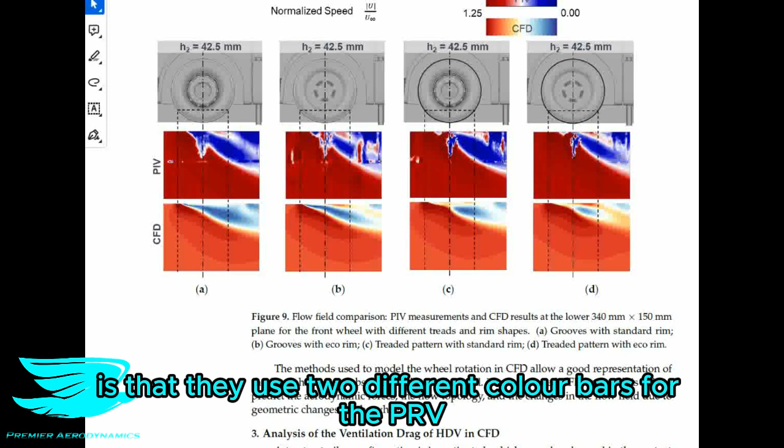One thing I should mention is that they use 2 different color bars for the PIV compared to the CFD, which is never a good idea if you're trying to compare things. If you're trying to compare things, you should use the same color bar. So that makes it a little more difficult here to compare, but still I think we can conclude that the wakes are generally pretty good, but they are a little bit off to some extent.

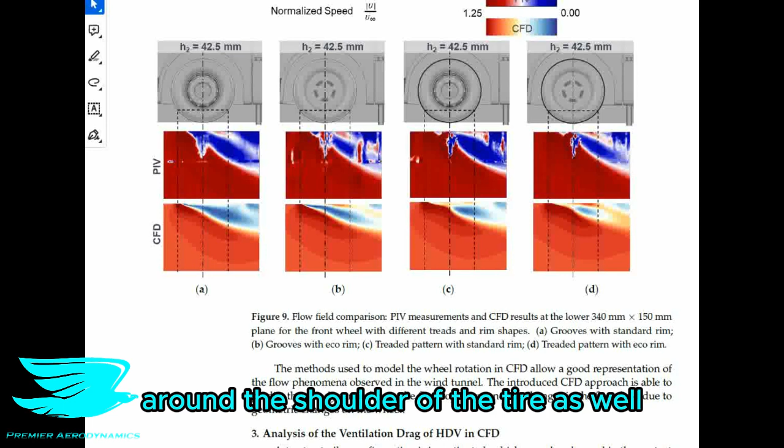So this validation section here tells me that the CFD didn't capture the flow around the shoulder of the tire as well, and maybe even how much flow is funneled down to around the contact patch near the tire and the ground because of these wakes forming down in this region. This could easily be because of different tire shoulder sharpnesses or different streamline curvatures because of the test sections, and perhaps there are other reasons why the CFD is different.

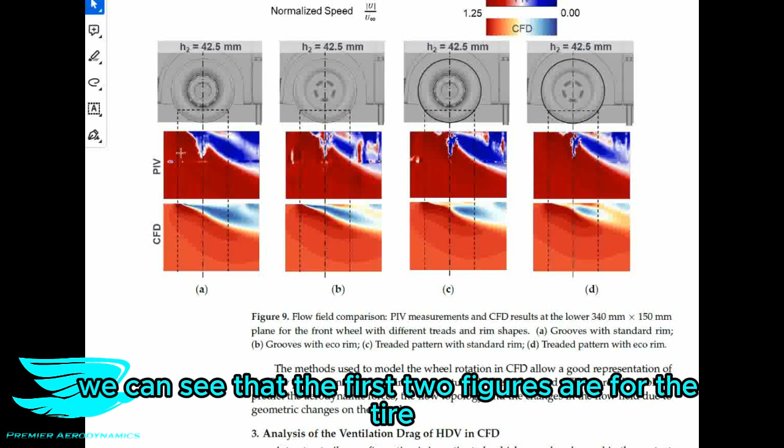But anyway, let's focus on the PIV from the experiments. We can see that the first two figures are for the tire with just longitudinal grooves and for different rim configurations.

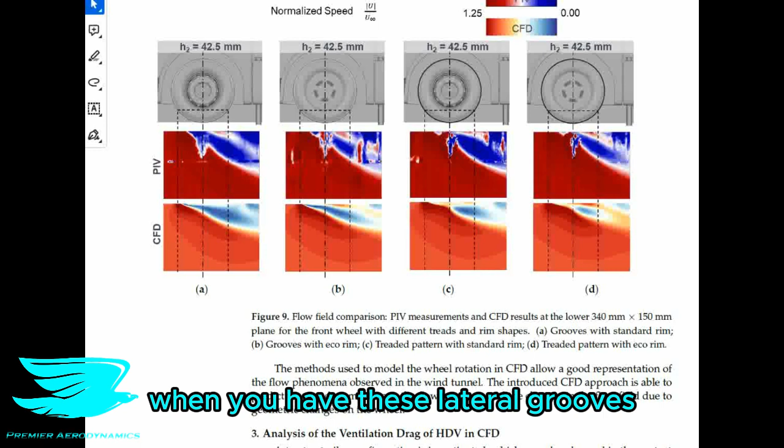The last two figures are for the exact same rims, but for tires with lateral grooves as well. It's quite clear that the lateral grooves reduce flow separation around the tire shoulder. For the longitudinal groove, separation starts much sooner upstream, as opposed to here it's about midway. That makes sense, because when these lateral grooves meet the edge of the tire, they're effectively making the shoulder at this point have a larger radius of curvature, meaning they are more rounded.

Comparing that to the spaces between the two lateral grooves, that edge is much sharper with a much smaller radius of curvature. That radius of curvature greatly determines whether the flow will stay attached or not, with a smaller radius meaning a sharper edge, resulting in the flow more likely to separate. So I'd be comfortable concluding that the lateral grooves are making the flow stay attached around the shoulder more, which in part is responsible for the drag reduction.

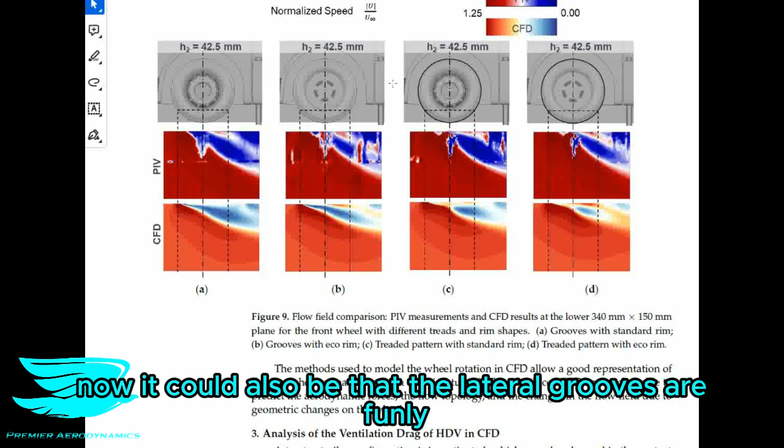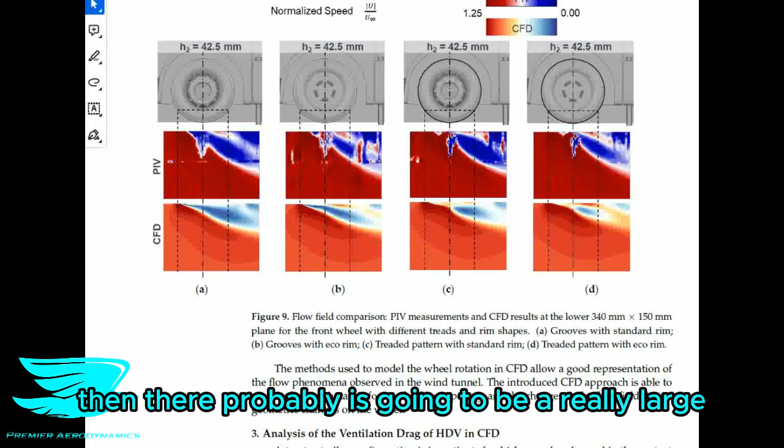Now, it could also be that the lateral grooves are funneling more air down here, maybe making the wake a little less wakey, but we don't really know that from this data. That makes things more complicated, because flow attachment is usually accompanied by a drop in drag in this region, and if there's a drop in drag here, there's probably a large increase somewhere else, or a general increase across a larger region, because from Table 1 we saw that the lateral grooves add a lot of drag. So that's something to further investigate.

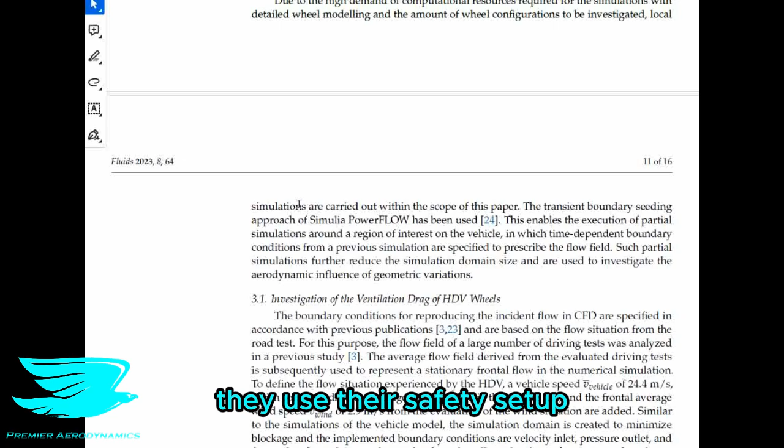Now let's move on to the ventilation drag. I must say the way they tried to decouple the ventilation drag from the rest of the drag of the wheels is a little dodgy—and by a little dodgy, I mean a lot dodgy. They used their CFD setup to compare values to the experiments and then determine what the ventilation drag was, given that they weren't able to directly measure it in the experiments.

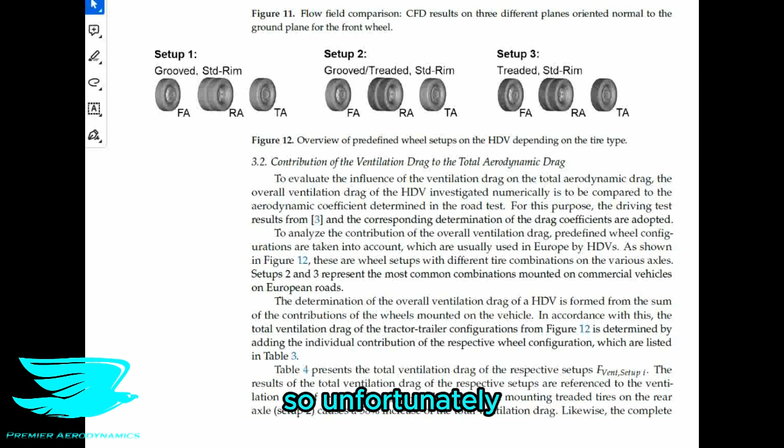They tested a few different setups: single wheel, then double wheel, then single wheel again with different rims and tread patterns. Unfortunately, each setup has this double configuration in there, and the reason I don't like that is because the CFD was passable for the single wheel, but as soon as we went to the double wheel, I don't think the results are that accurate. That makes the total results of this section not very trustworthy.

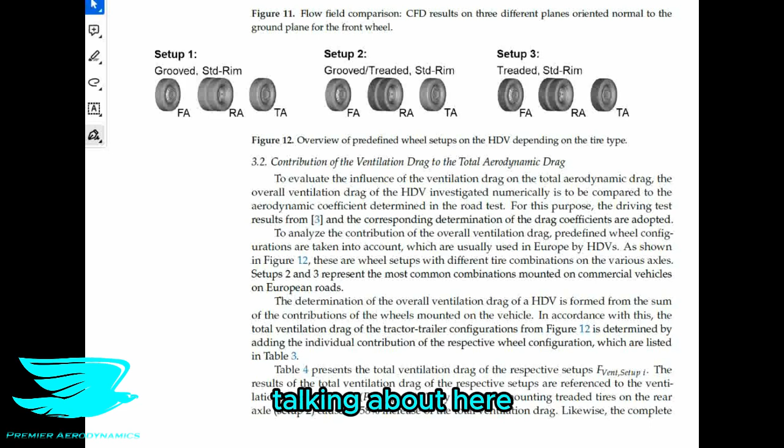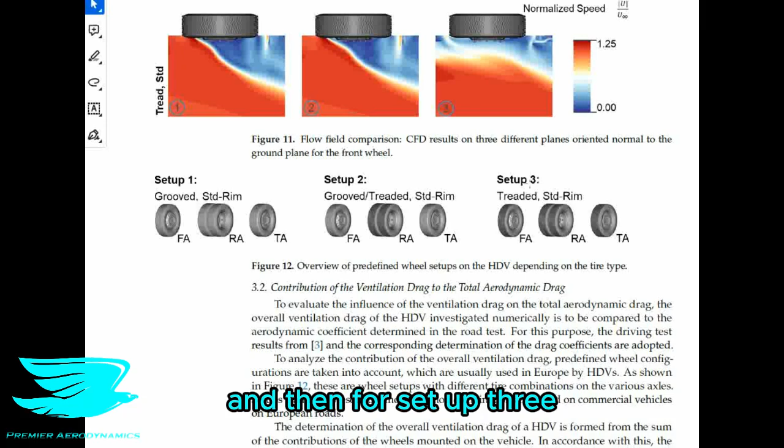Anyway, just as general interest, let's go through what they were talking about. They found that the longitudinal grooves added quite a lot of additional ventilation drag, and the lateral grooves added more than double, according to the CFD wind tunnel hybrid approach. In Table 4, setup 2 compared to setup 1 was a 58% increase—setup 2 had tread like the lateral grooves on the two double wheels—and for setup 3 we had lateral grooves across the entire range.

And when we put more lateral grooves on, we get a lot more ventilation drag. That's quite interesting, that such a small feature as these lateral grooves can add so much to the drag. Again, this is CFD-derived, so I'm not sure if it's completely accurate, but I'm pretty sure the trend is generally true.

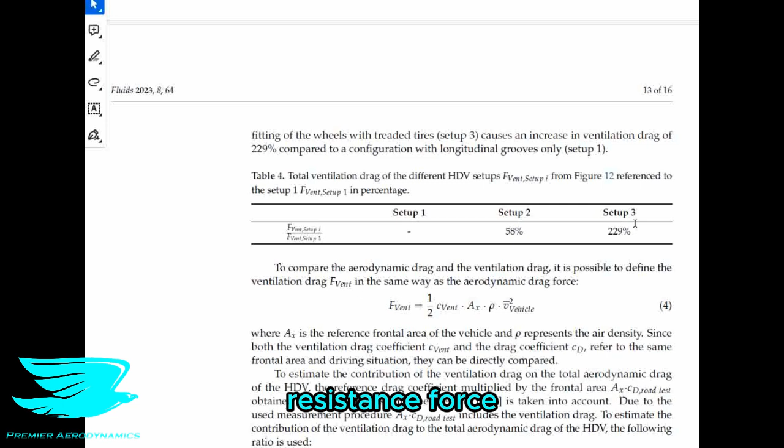We're seeing that as we add more lateral grooves, we're getting more and more drag, and it's interesting because it kind of makes sense that these lateral grooves are chopping through the air, resulting in a lot of resistance backwards for the wheel. That means the engine has to produce more torque to overcome this resistance force—that's the drag. So that's a pretty cool result, and that brings us to the end of this podcast.